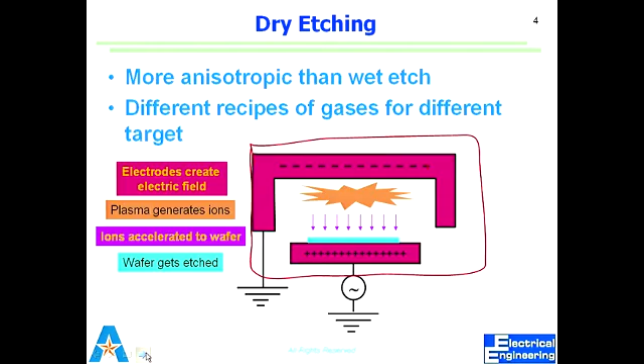So, okay, this variation can be an effect of many things. It can be how good the plasma is, how good the power transfer is in the chamber, right? How quickly can we suck out the byproducts? But even if I take the upper value, suppose it's 4,000 and that's 5,000 and it's 400, so anything less than 400 will be gone.

So to get there, I can easily calculate what is the minimum photoresist thickness I need. And you'll be glad to know that we always have much higher thickness of photoresist once we do lithography, if the feature sizes are not very small. If the feature size is 1 micron, you can have a micron thick photoresist. A micron thick means how many nanometers? 1,000 nanometers, 10,000 angstroms. So that will be more than enough to do this 5,000 angstrom etch.

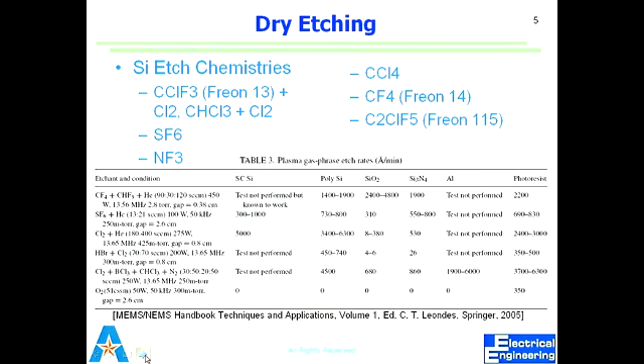Yeah, there is nothing too intellectually special to safeguard in those things. Right? So then the concept of isotropic. So generally an isotropic etch is something that has equal effect in all directions.

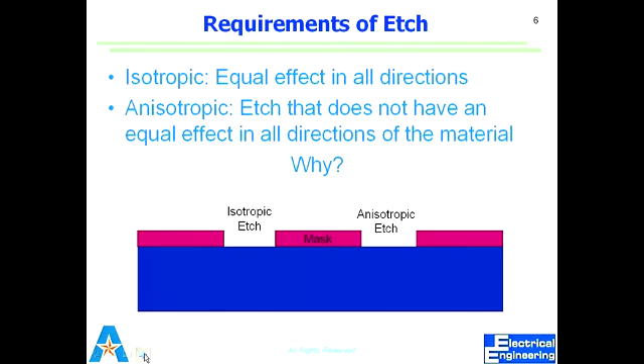An anisotropic etch has selectivity not just within the material, but selectivity in terms of direction as well. So it's what we can call chemical affinity in a certain direction, or the etch rate is different in certain directions, so it can be defined in many ways. But the idea is that if you look at dry etch, an isotropic etch will go in all directions, but an anisotropic etch will give us what we call high aspect ratio features.

So why does it happen? Because a field gives direction to ions, so they travel straight. But in a simple dry etch process called RIE, reactive ion etching, they cannot go too deep, because once they get into something which is high aspect, they tend to collide with the walls. So the reaction product cannot be removed fast enough before new etchant comes in and etches further.

So there's a limitation on how deep we can etch using RIE, reactive ion etching, and on how deep we can go while maintaining reasonable vertical walls. Because what happens is, if there is no anisotropy, we end up getting something like that, or we have defects, we get something like this at the bottom. So all of these things are not what we want in most cases.

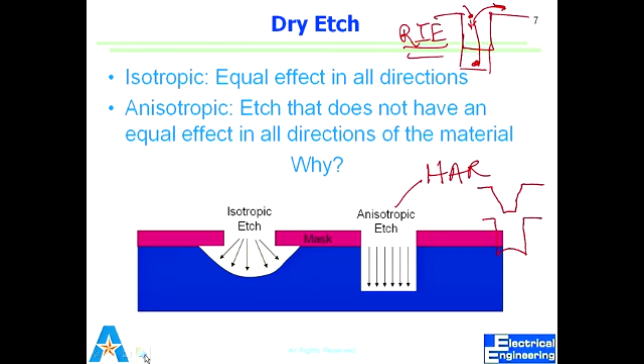For wet etch, the anisotropic definition is slightly different, because in this case we don't have directionality going straight to vertical, but directionality against the different crystalline planes of the single crystalline structure. This means that wet etch can have anisotropy only for single crystalline material, not for polycrystalline or amorphous material. Does it make sense?

What would be the mechanism for anisotropy for wet etch? Crystal structure, of course, that's what I said. It depends on crystal structure, but why? Different crystal planes will have different numbers of atoms present for reaction.

So even if we start on a plane surface, after a while the etchant starts etching one particular direction much faster than another. So this is a close approximation: if there's single crystalline silicon with 100 in this direction, then this is 111, and this is just a slice.

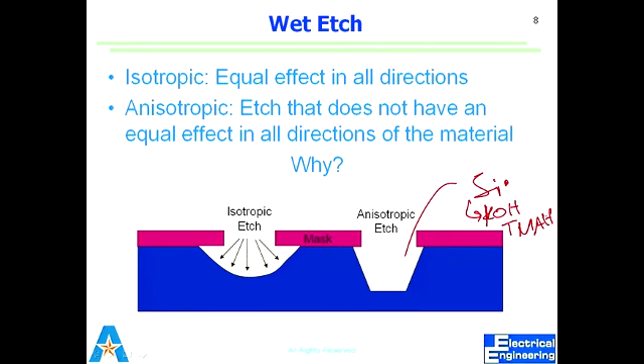Silicon, and what we use is KOH or TMAH. KOH is potassium hydroxide, TMAH is tetramethyl ammonium hydroxide. We'll look at these when we get to the etch part.

So what do we want from the etchant? We want it to be selective, so it has different affinity for reacting with different materials. So they can have different etch rates, which gives us a material that can be used as a mask - so etching happens only away from whatever is below that mask and not to that material.

We see that the lower material has been etched, giving a very non-uniform field. That tells us this is not uniform. If it does something like that, it would be very variable on different dies, so there's no uniformity. We want uniformity of etch from one chip to another, from one wafer to the other. On one wafer we have different dies, it should be the same all over, and from one wafer to the other. It's not an easy job.

Once we get there, we'll see why. And we want to come up with processes which are cheap.

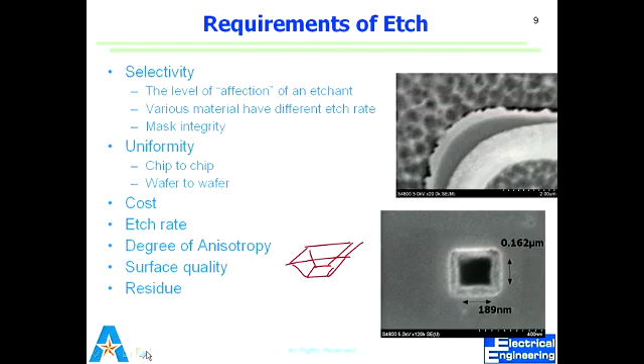What is left behind after an etch is also important. If we use KOH for etching, it leaves behind potassium ions, which are bad. They are fast diffusers; if you heat the wafer up, they get into the crystalline structure and disturb the electrical properties. So there are all these things that go into defining an etch process.

With etch we remove things, with deposition we deposit materials. We can deposit a very large range of materials: amorphous materials, single crystalline materials, and using special processes where we have something already crystalline, we can deposit material on top of that in crystalline form.

This can be done just by physical deposition, where we are more concerned about adhesion between different materials, or it can be a chemical deposition where we do some reaction, maybe in the chamber, and the product is deposited on the surface, or we want reactants to get on the substrate and react to form a film. We do deposition of many things.

In physical vapor deposition, the simple idea is we have a high purity source material, and we evaporate it, we melt it. When something melts, it evaporates. So when it evaporates, it goes in the open direction, which is the top. Once those atoms are traveling, the first surface they come in contact with, they adhere to, and that's where we put our wafers.

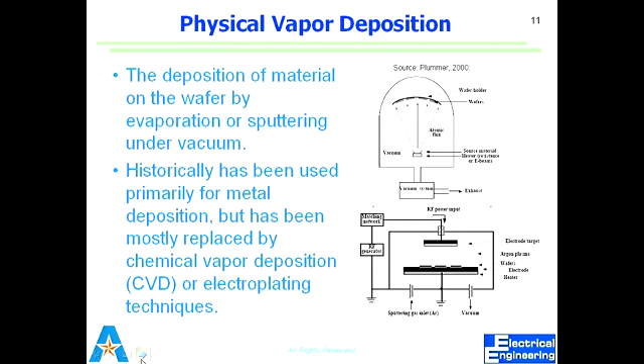There are a couple of different types of CVD. One is called plasma enhanced CVD, which is this case. There is another which is called LPCVD, low pressure CVD. In LPCVD we don't use plasma, but essentially it's again a chemical deposition process. We'll look at these later on.

So in LPCVD, we supply a number of gases and maintain low pressure. The reaction results in products which get deposited onto our wafers. What happens during the deposition process? We have reactions that may occur in the gas phase, or may occur once it gets to the surface. In either case, they start accumulating and result in formation of a film. So we have this chemical reaction that results in film formation.

For that reaction, we have to supply energy, which is either coming from plasma or from heat. So this PECVD is very similar to RIE.

LPCVD is very similar to oxidation, but the difference is in oxidation we are not doing any chemical reaction except oxidation itself. In LPCVD, our reaction depends on the gases that we supply, and that results in whatever material.

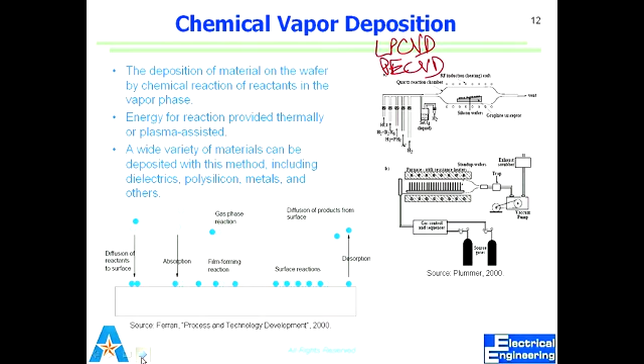It starts with very low power, and then you gradually get to the actual power your recipe requires. So these two, PVD and CVD, do deposition of amorphous materials, without any crystalline structure. But we know now that we make many layers of devices on our wafer. How do we get crystalline silicon on top of something which has been covered in sputtering? Sputtering is another way of depositing here.

But epitaxy is a process where we deposit crystalline films, so we can use them for the next level of devices. Essentially what we need for epitaxy is one layer, or what you call the seed layer of crystalline material, and then we can grow crystalline material film out of that. So we have the underlying crystal and we grow it on top of that.

Now, the devices that we make are made in epi silicon. For epitaxy, mostly when we say epi, that means epitaxial silicon. So once you get wafers in industry, those already have epi grown on top of them, and we use that to create our devices. What's that layer called again? The epi, first layer, epi, EPI. It says epi silicon.

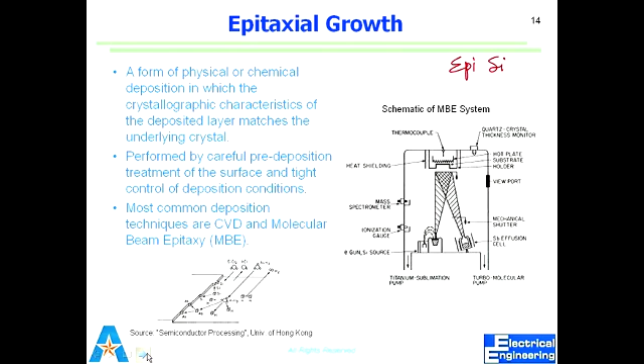Again, it's pumped down to have low pressure, so you can reduce contamination and have higher mean free paths for the travel. We'll look at EPI also once we look at those processes in detail.

CMP stands for chemical mechanical polishing. So after one layer of devices, we need to flatten out the playing field and start over again. Once we get to the next level of device, we have to flatten out. So it's a combination of mechanical and chemical rubbing of a wafer, but very fine rubbing.

Your surface roughness is within a few nanometers, so it's a very fine polishing process. It depends on if we are concerned with planarizing just a small region, or if you want to do planarization over the whole region.

Essentially, if you break the process down simply, there's a holder keeping the wafer face down and rotating, and then we have a polishing pad, which is also rotating. Whatever comes out of that polishing process, we want to clean, and we want to apply further liquid called slurry, which keeps the polishing going on. So slurry has things that chemically etch or has grains, which basically rub the surface to remove the material that you want.

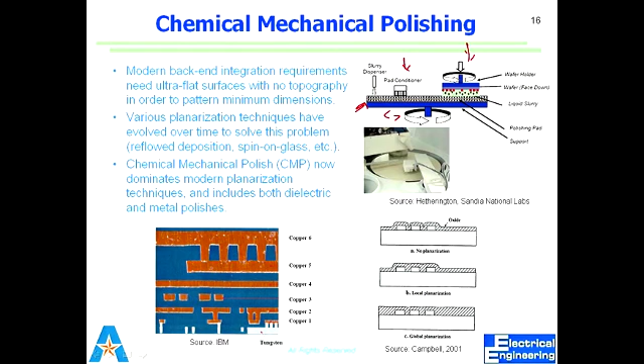Reflow, deposition, spin-on glass - so there are other planarization techniques. So far we have touched upon all the basic processes we will look at, though probably we won't do all of them. We don't have CMP here, but anyway, you'll do one layer of devices.

We'll look at a very fundamental process: oxidation. I could have put photolithography before oxidation, but oxide is something we can grow on a bare wafer. For lithography, first we have to have some material we want to use as a hard mask later on.

So oxidation comes probably before lithography. Let's start with oxidation. If we grow out of silicon, we call it growth. If we deposit, we don't call it oxidation - we call it oxide deposition, because that's a deposition process.

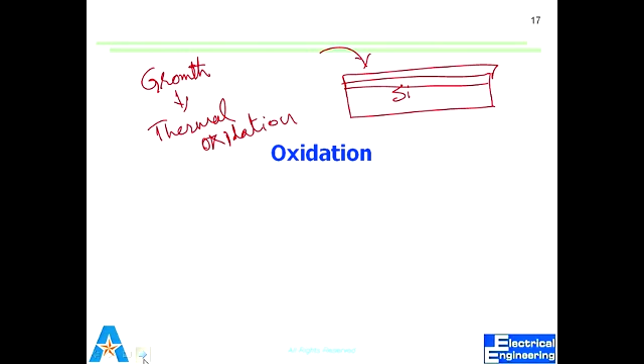So whenever you hear or read oxidation in your diagnostic exam or exam in this class, oxidation will mean thermal growth of oxide. There will be two types, either wet or dry, and we'll see what the differences are between wet and dry. Some very basic features should tell you what kind of oxide is being talked about, and we'll see what those properties are.

You guys, I hope, have read the paper on the Deal-Grove model of oxidation. I have some simple equations from there that we'll see. But that model is not used for thin oxide, because thin oxide growth is a very fast process. Once you get above that thickness, you have a barrier to the oxygen species getting to the interface - then the Deal-Grove model is more applicable. Before that, it's a very fast process.

What happens at the interface? What happens to the dopants if you do a high temperature process? This is the interface of silicon and silicon dioxide. So you can tell your friends that we can see atoms - this is essentially atoms. You see that periodic structure, which breaks down in silicon dioxide.

There is still limited order in silicon dioxide. That limited order is what makes one type of silicon dioxide better than the other. Where do we see different types of silicon dioxide? Quartz versus regular glass, versus the silicon dioxide that we grow. They are very different in their brittleness and physical properties.

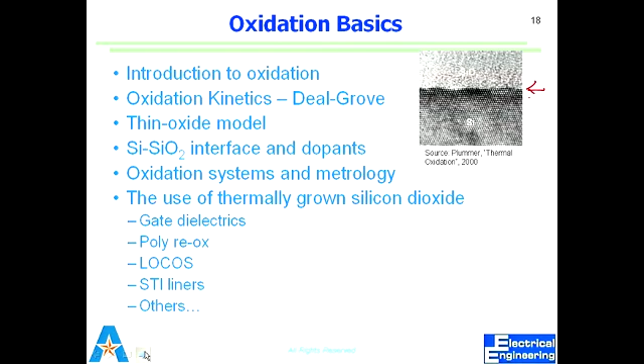So if I have gate oxide, I need it very thin, I need it high quality. So what kind of oxide do we do? If it's thin gate, what kind of oxide would we do? Dry oxide, right. But if the thickness goes high, for other types like field oxide, masking oxide, what kind of oxide will we grow? Wet oxide, right.

And native oxide is something which is very, very thin. In dry oxidation, we have just oxygen, and in wet oxidation, we have water vapor used during the silicon dioxide growth. That extra hydrogen results in higher porosity silicon dioxide, which changes its etching properties and changes its electrical properties.

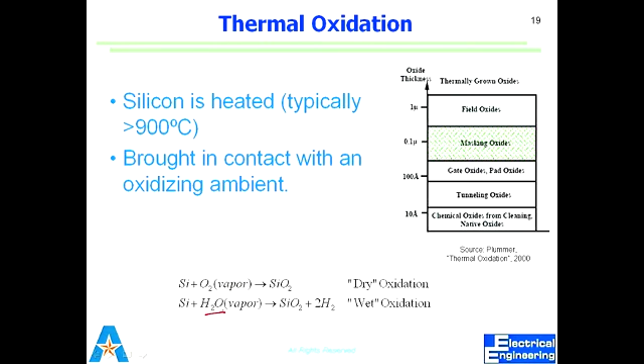So this is dry oxide, right? Which one were we talking about with the extra hydrogen? The wet oxide, I'm sorry - there are two lines. So the wet oxide and dry oxide have different reactions that occur. Without water vapor, if we have just oxygen, that creates a better quality oxide, but it's slow to grow.

Its electrical property and ease in growing is what has made silicon dioxide this insulating material. But since we are becoming very close to a few atom thickness of silicon dioxide, it's becoming less dependable, because physically it's become so thin that electrical tunneling is occurring through it. So we need some other material which has the same dielectric contribution but is physically thick. So we use high-K dielectrics, in which the end result with high K and higher thickness, the end electrical coupling is the same.

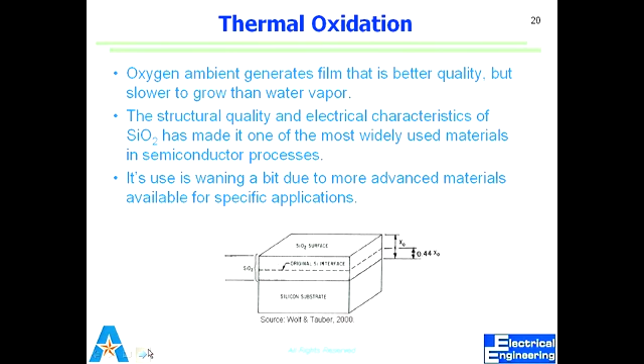So in certain thickness of silicon dioxide, there is 44% of silicon consumed in it. So what happens on silicon dioxide? We have 4 oxygen atoms that bind to it, creating a tetrahedron structure, and these are paired—shared between adjacent tetrahedrons.

Interesting word: amorphous silica, which doesn't have any crystalline structure, but it has bridging of those atoms occurring, which makes it more or less dense, which makes one oxide different electrically than the other oxide. So how many types of oxygens are there? Bridging and non-bridging. So if I have many more bridging oxygen species, is my oxide better or worse?

The oxide is more crystalline then. It's much more crystalline, much more dense, less porous. So is it going to be electrically better or worse? Better. What is the job of silicon dioxide? To insulate. So we want something which is dense. That makes one type of glass more expensive than the other, and makes bulletproof glass stronger than regular glass.

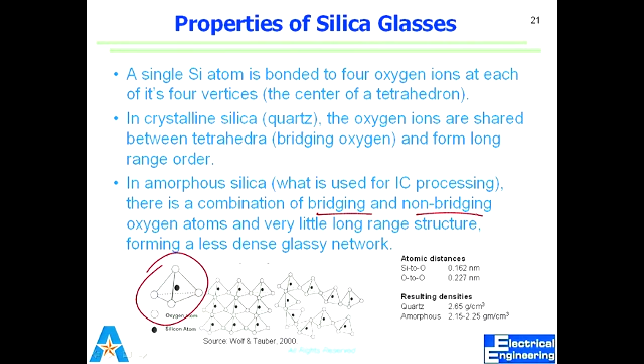So, bridging and non-bridging oxygen give long range or little long range structure. What we grow thermally is dense, robust, and a very good insulator, and gives a clean interface with the bulk silicon. And we can have impurities embedded into the silicon dioxide.

So we call these network modifiers, or we can have free hanging hydroxyl groups—these are the bridging and non-bridging atoms of oxygen available there. So what do the network modifiers do? They weaken or strengthen the network, the silicon dioxide. So doping is done to give them additional properties.

So what happens in wet oxide is we have many more hydroxyl groups which weaken the structure. That's the fundamental reason why wet oxide is fast, but electrically not good—it can result in tunneling even with a thicker film than a dry oxide, where we can thin it and still not see any tunneling of current.

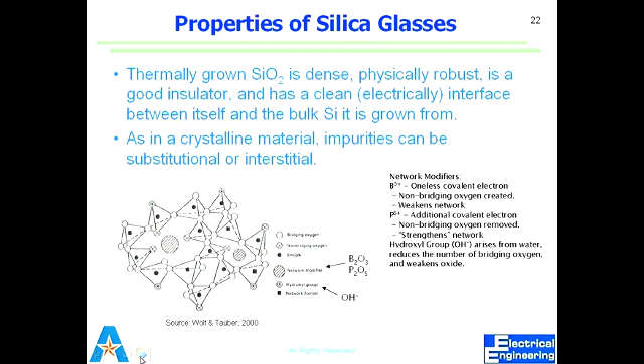These are important considerations when looking at the physics of oxidation. What are the properties that make it interesting for us? It doesn't melt at very high temperature—it can sustain very high temperature. So essentially, once I've oxidized, I can use it for everything. Any high temperature process can be done with the oxide on, which is good—it doesn't reduce my thermal budget, and doesn't add restrictions to my back-end-of-line processes.

So even after I've made a few layers, I can still oxidize—put it through a high temperature process, and my oxidation oxide will still be fine. Density would be higher for thermal silicon dioxide, which would be less for other oxides, because in this case we are making it out of a single crystalline material, which makes many more of the atoms bridging than non-bridging.

Dielectric constant, 3.9, we don't do it. So resistivity, energy gap, conductivity, expansion, these are all physical, mechanical, or electrical properties which are very conducive for silicon. If thermal expansion was different, way different than silicon, we would have stress issues, right?

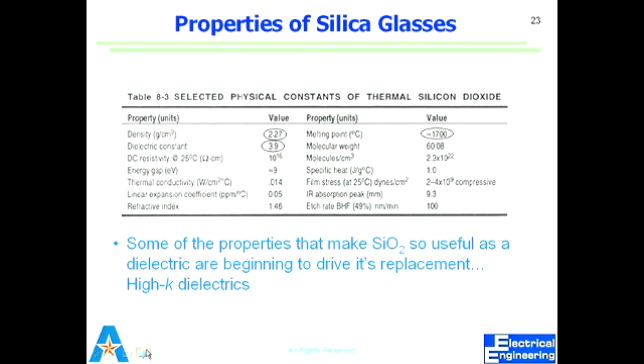So this is interesting, high K, we'll look at what is a little more mathematically high K. How does oxidation occur? As said before, you have native oxide, right? So oxygen starts interacting, converts into silicon dioxide, and the film starts growing. As the film grows, oxygen has to now pass through that barrier and get to the interface before a reaction occurs.

So now we have three major parts of that process. One is called F1, where you have plenty of oxygen available, right? So the reaction is almost instantaneous on the surface, but now it has to travel through that thickness, and the flux falls as it travels. What is flux again? There are a few definitions I want you to always remember. How do we define flux?

Number of particles, atoms, electrons, holes, whatever, passing through unit area in unit time - that's flux density, and flux density and flux we use interchangeably. We call it flux.

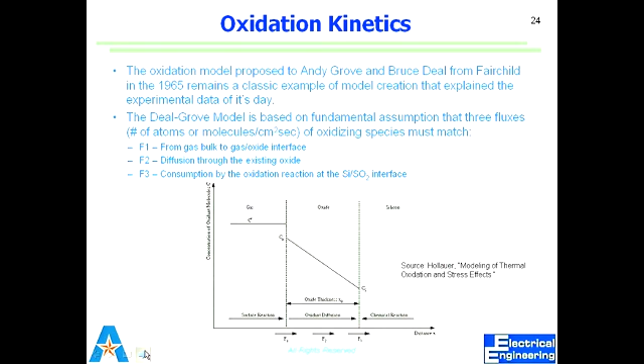So F1, F2, F3 are written there. F1 is how fast we can transfer the mass inside the tube. Oxidation happens in the furnace - how fast can I pump the oxidizing species to get in there? F1 is driven by the concentration difference of the oxidizing species.

And that brings up the question of dissolving something into a solid material. Just like diffusion, we now have oxygen in the gas state, and we have a hard substrate where we want it to diffuse into. This can't be done at room temperature - it has to be done at high temperature, so those oxidizing species get enough energy to change medium.

Not anymore, because now we have real dependence on P, where a change in P will define how much oxygen can diffuse into silicon. Is K a constant relating to NR? Boltzmann is always a constant - so it's the number of moles times the Boltzmann constant.

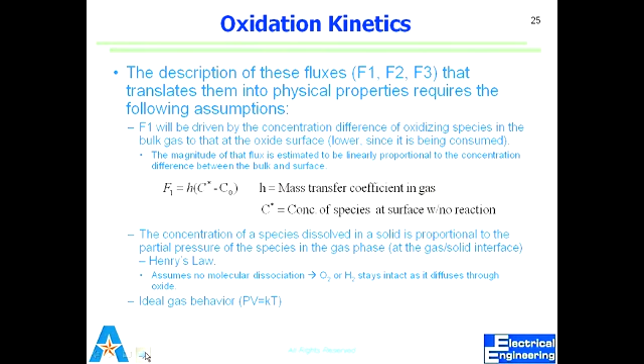That's a sidetrack question, but let's get back. F2 is what we get from Fick's law, which is diffusion through that layer of silicon dioxide—it depends on the concentration gradient and diffusion coefficient. The third one is the reaction rate, which depends on Ci, the concentration of oxygen at that interface, times the reaction rate constant Ks, which defines how fast the reaction will go. So F3 depends on how much oxygen makes it through to the interface, which determines whether the reaction goes fast or slow. Questions?